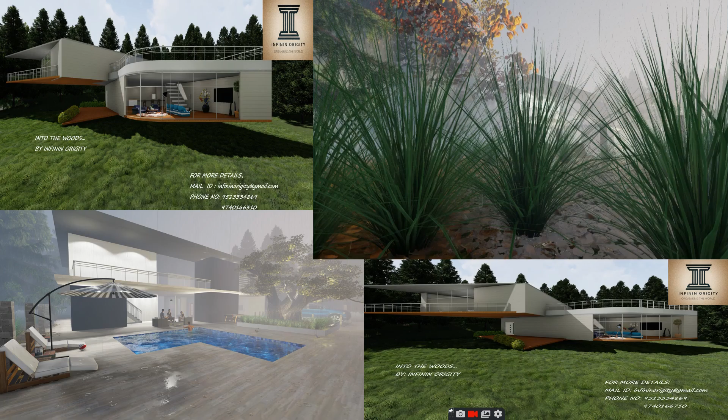So these are a few of our renderings made in Revit. This is one of the projects. These two are one of the projects in Madikeri, and this was one done in the Sakleshpura region. And this is one of the renderings, walkthrough renderings, which we had done. Please have a look at it.

So these were all rendered in Lumion, but they were constituted in Revit basically. Now we shall have a look at the software itself directly.

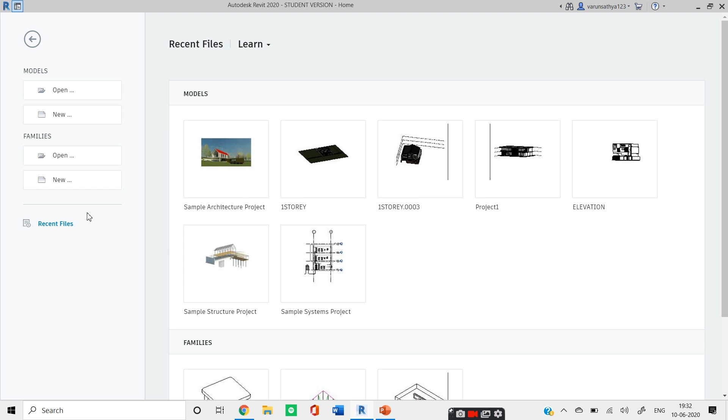So this is your Revit. As soon as you open Revit, you're gonna get this basic file. Let's enter a sample architectural project. It's loading, it takes time. Now you can see it has been loaded.

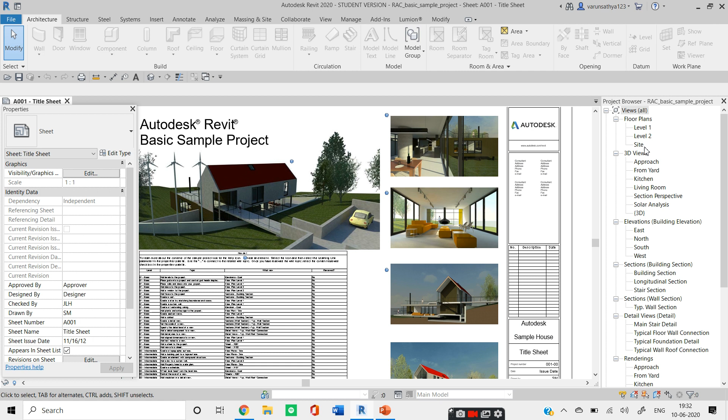As soon as you open, you get a sample sheet. Now let us go into level 1 floor plan. As you can see here, this is the beauty of it - every single detail in a single given slot.

For instance, to show you, there's a door here, a door to this bathroom. If I click on it, it's going to show the details of this door in this property panel. It's showing that it's a single flush door of width 800 mm and height 2100 mm.

You can edit this type. You can literally edit the door material, door frame material, thickness, height - almost everything. You can shift it, make it open outwards. You can do everything with it.

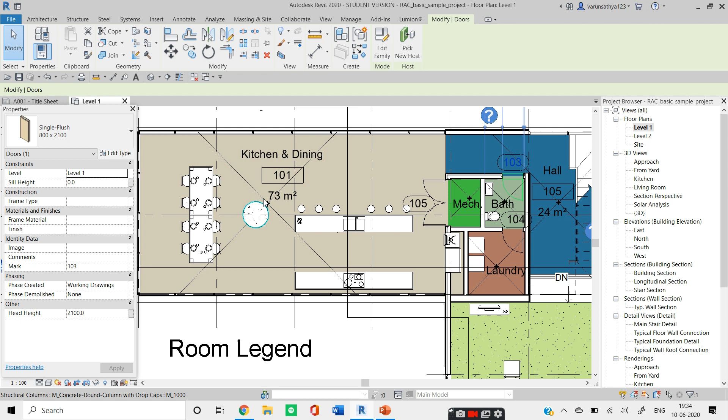And you can tag the rooms. As you can see, the rooms are tagged here - this is A room, B room. If you closely observe, you can find kitchen and dining, tag number 101, area 73 meters square. Such beautiful things on a single platform, which you get to do in half the time it requires to do the same thing in AutoCAD. So this is the beauty of Revit actually.

I'll show you a much more detailed version of it. As I said, it's a BIM platform - you can see the 3D approaches. Let me go to the 3D view itself directly.

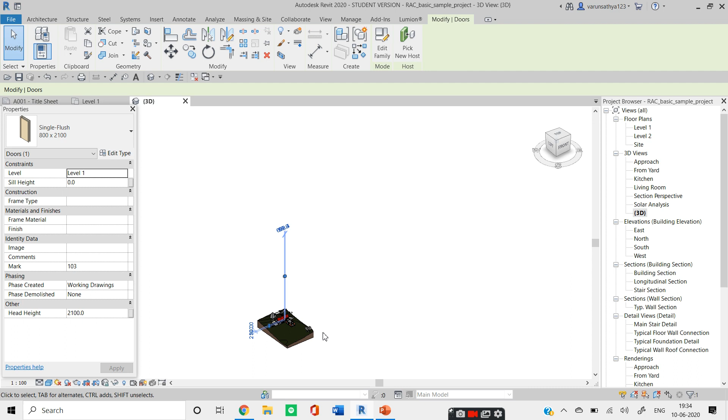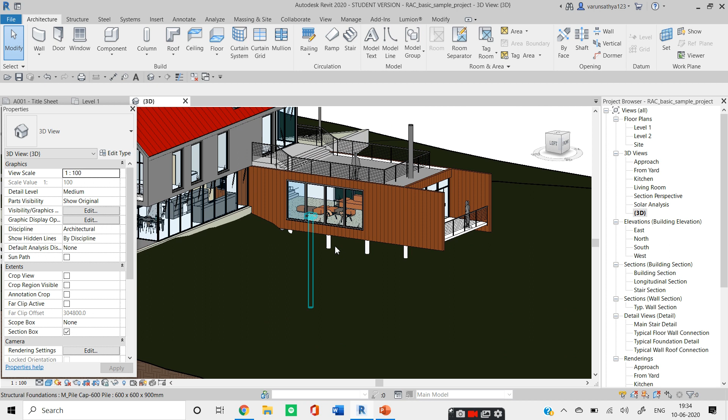See, here the beauty comes. You can see it has gone into a real-time visualization where you can see the building, the mass, which has been georeferenced. The contours have been plotted. It is all ready, just in one file put up - ready to render, ready to be worked out in the field.

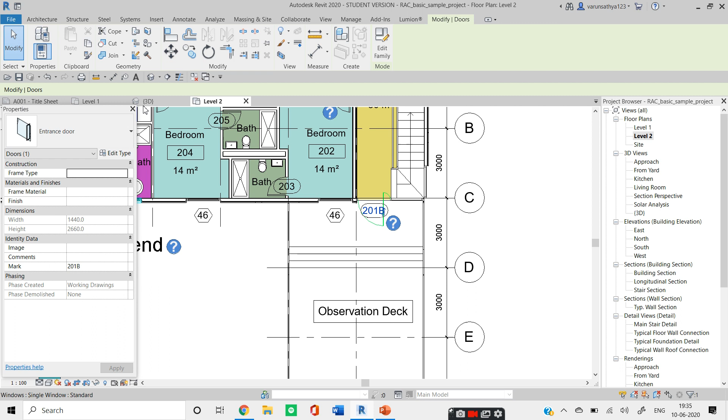So this is how it looks. And the beauty comes here - for instance, if I go to level 2 and select this door right here, it's showing it's an entrance door. You can see it is automatically selected in the 3D view as well, without any requirement of going there and selecting again.

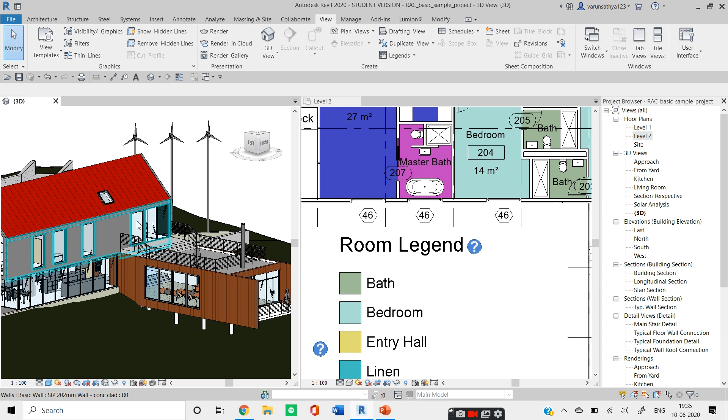Let me put it in the tile view for the betterment of your conceptual understanding. Now you can see this door is selected right here. This is the door which I selected - you can see it got selected there. I show you again, just watch here. I'm selecting this by pressing the left button of the mouse. It got selected in green there.

Now I want to move this. If you had to do this in other software, you'd have to move it in the 2D plan and then do the same procedure in the 3D plan. But in Revit, as I said earlier, it's real-time visualization - so you just move this thing to anywhere you want.

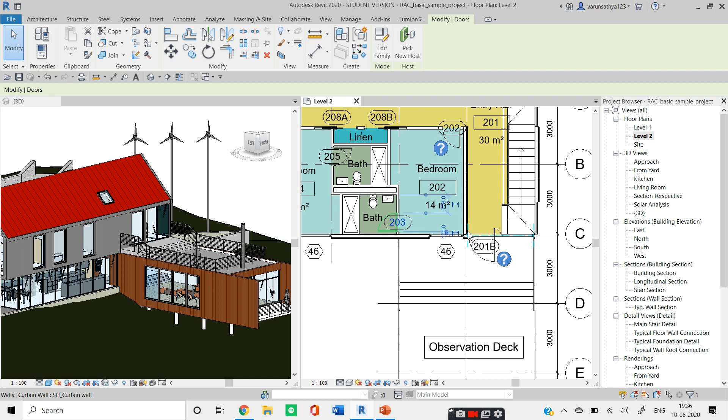For instance, okay that is the fixed door - actually we have locked it, this door. You can see the door got selected. Now I just want to move it to this end. So I moved it - it automatically moved its position from this part to this part without any double procedure. It is as simple as that.

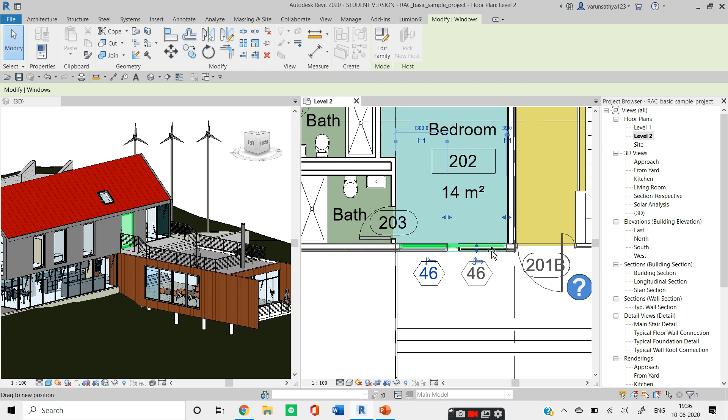It's as simple, as beautiful as you can imagine. I just want to move this back to its original position - it moved back. So that is the beauty of Revit.

Now let me bring back the property panel, and as you can see, renderings - so you can render here as well. This is the approach render.

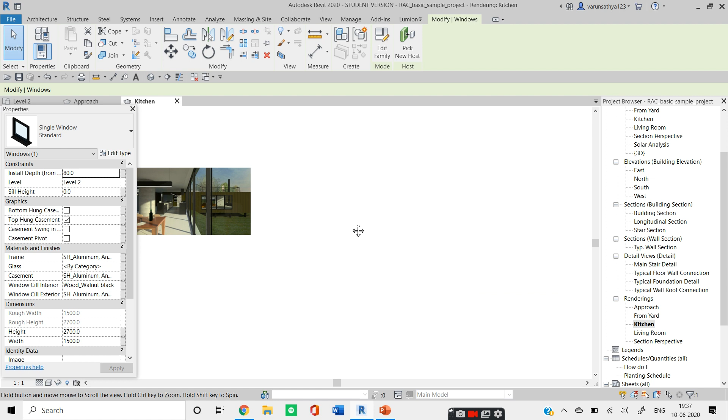Let me show the kitchen rendering. This is how it looks from the kitchen. See, there's a real-time architectural rendering which you can directly convert into a JPG or PDF format and submit it to your clients. You can do it easily.

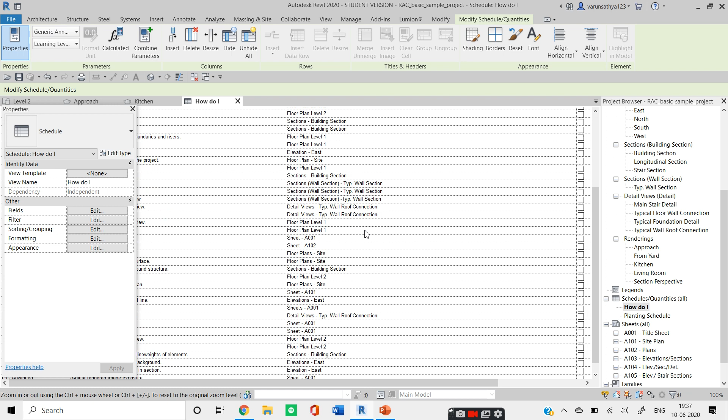And schedule - how do I do it? See, this gives a complete detail on the construction procedure as well. Construction procedures can be done.

Coming to the most important thing, you can see here the families. Families in Revit refers to the things, equipments, materials, or systems which have been used for the construction of this building. It consists of ceilings, conduits, curtain panels, curtain systems, doors, duct systems, electrical equipments, entourages, flex ducts, many things. Almost everything has been listed out.

You can just click on the doors. You can see the types of doors which are being used. For example, if I had to go with the M double flush doors, you can see the dimensions of it in just a single click, rather than searching for documents, which can be done on other software.

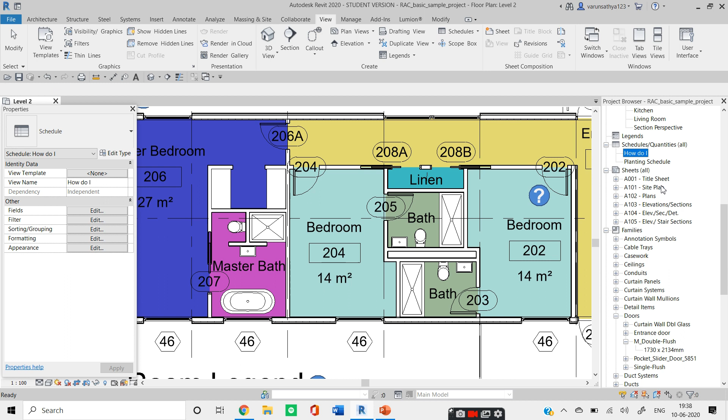Now, coming to the most important part of it, sheets. These are the things which make up Revit, to be frank. You can literally imagine the sheets. See how beautifully it is done - both the floor plan with almost every possible detail given in a single crisp manner. You can see this is the second floor drawing and this is the first floor drawing. So that is the beauty of Revit actually.

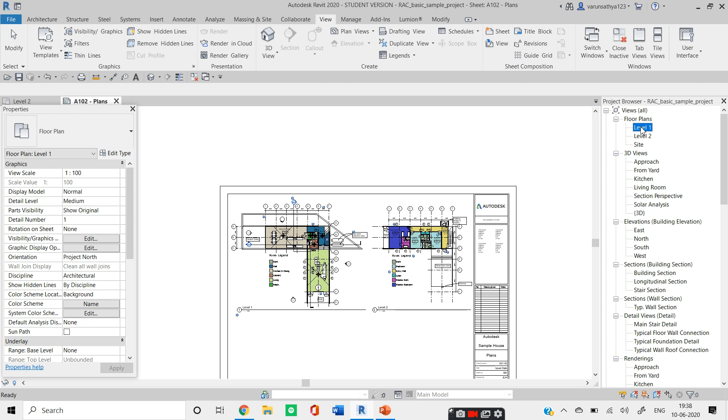Revit you can render in cloud. There are many more features in Revit. So let me reveal one simple tool for you today. Most of the things will be taught from scratch to the professional level in the upcoming classes, but let me reveal one trick on how to multiple select a single family.

That is to say, if I want to select all the doors present within this floor plan, how do I do it? That is the question. See, there is one door here, there is one door here, there is one door here, and so on.

In the traditional way which has been taught to students, which we observe coming to the field, coming for companies - we see when we ask these questions in interviews, they just say click on one thing with the left mouse button, press the control button, and simultaneously click on the other equipment or details which have to be selected, like this.

That is okay for buildings of 2 plus 1, 3 plus 1, 4 plus 1 or 5 plus 1. But what about the case when it is a 30-story building, 40-story building? So there comes these tools.

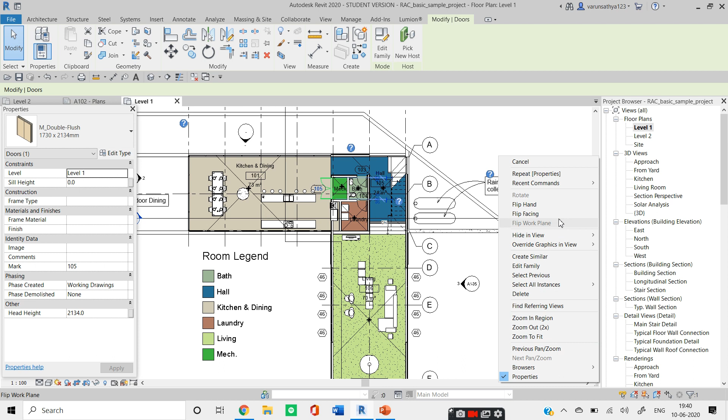Let me explain how to select the required selection. Just click on one part of the door, right click anywhere on the graphic user interface. You will get to find one thing called select all instances. Just go there.

Now you can select all similar doors within a given view, that is level 1, or within the entire project, inclusive of both level 1 and level 2. I'll just select within this view, level 1. So that is only the M double flush doors - only that got selected.

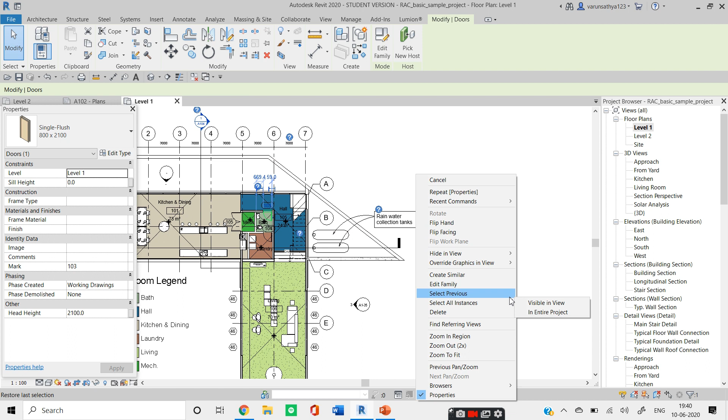If I had to select this single flush door in the same way - there are two single flush doors - how do I do it? Just right click here, again go to select all instances visible in view, and both doors are selected. Now you can edit them together as a single prospect.

There's another way. Now you click your left mouse button and drag a rectangle throughout the section. You will find everything selected, and there are 305 items within the single floor. It shows 305 items, and you can find the doors - there are 5 doors, 5 door tags, 24 furnitures, and so on.

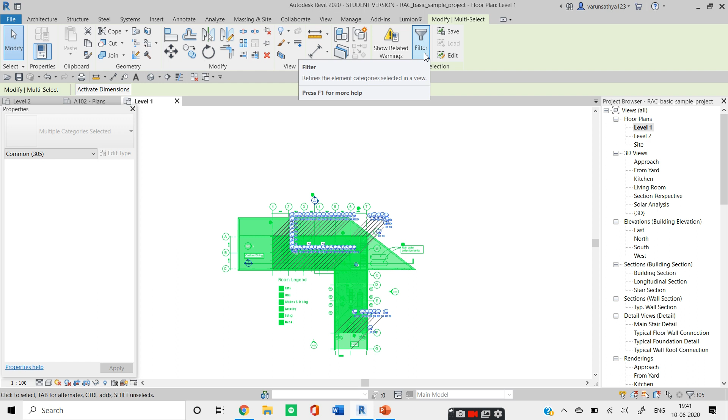Now you just press the filter button which appears as soon as you select. Press the filter button, then press check none, click on doors, click apply, and click OK. You're going to find all the doors selected. See here - 1, 2, 3, and here you go with the fourth and fifth door. 5 doors selected.

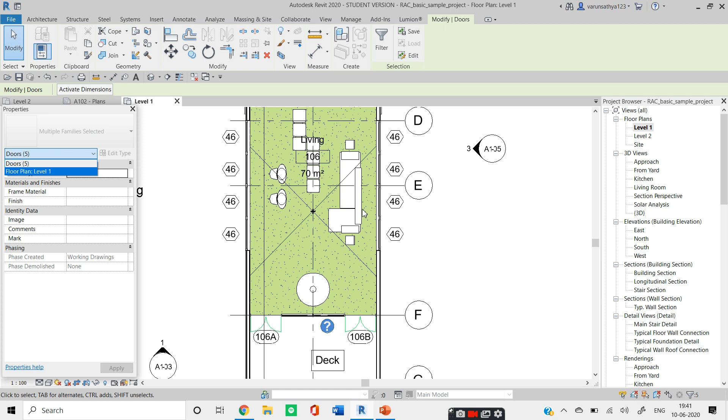That's it, it's done. Such is the beauty of the Revit software. I mean, literally, it is wonderful. It's wonderful to have an experience and cling over Revit.

Now let me show you how to download the free student version of it. First, open the browser, any browser. I prefer Google Chrome, and my system is Windows 10 64-bit version. So type in 'Autodesk free student version' in your browser, press enter, go to the first and foremost link, and press on it.

Now you will be asked to sign in. Here, click on sign in. As I already have an account, I just have to sign in.

If you don't have an account, you have to create one, and the creation of an account is a very simple procedure, wherein you have to enter your name, your details, your profession as a student - which year you are studying, what degree course you are studying, the name of the college you are admitted to, and all those things. Once you submit the required details, you will get a confirmation mail to your mail ID. Then you just click on it and you can set the password as well, and it's done. So creating an account will be shown in depth in our classes.